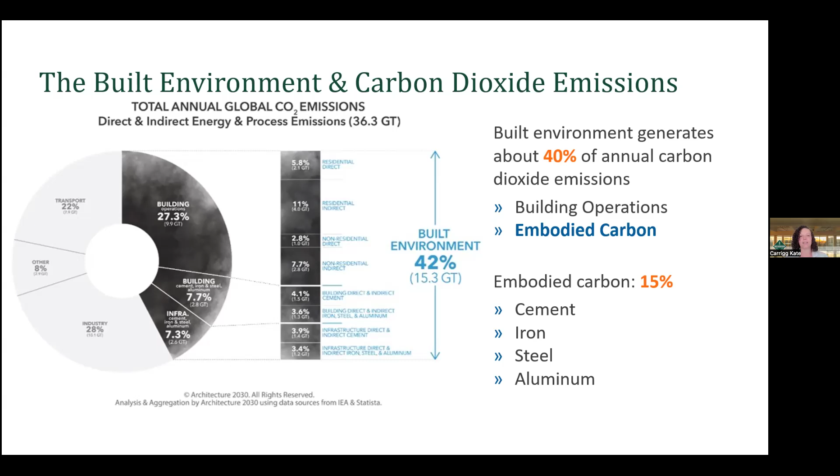And a smaller portion of that is the embodied carbon—that's the emissions associated with the extraction, processing, transportation, and construction with all of the materials we use. It may be smaller, but it's this large upfront cost that we pay every time we build a new building. It does represent a significant portion of overall global emissions, being 15% of all global emissions. So it's still something we need to be looking at, and it's something that's getting a lot more attention from our industry.

I mean, basically, we've decided that we need to build better. We need a better way to build, but I would argue that we already know how to build better. Our understanding of building science, our understanding of materials, basically everything we base our decisions on is above and beyond really what's required in our codes or what's required in our green building certification systems. It's above and beyond what most buildings are built to. Our understanding of how to build is above and beyond the way we build. And I think the question is, why is that, and how can we better address that?

Ultimately, the reason why it's hard for us to change as an industry is because there is so much diversity in our industry. Every building is built by a different developer or owner, and those owners range from single family homeowners to public entities, federal, state, and city governments. There are nonprofit organizations, tribal nations, and small minority women-owned emerging businesses that own buildings. There's so much diversity in all these buildings that are owned, and why they're owned, why they're built, and how they're used. So there are just so many layers in our built environment that we have to figure out how they all influence sustainability and address those layers to actually advance it.

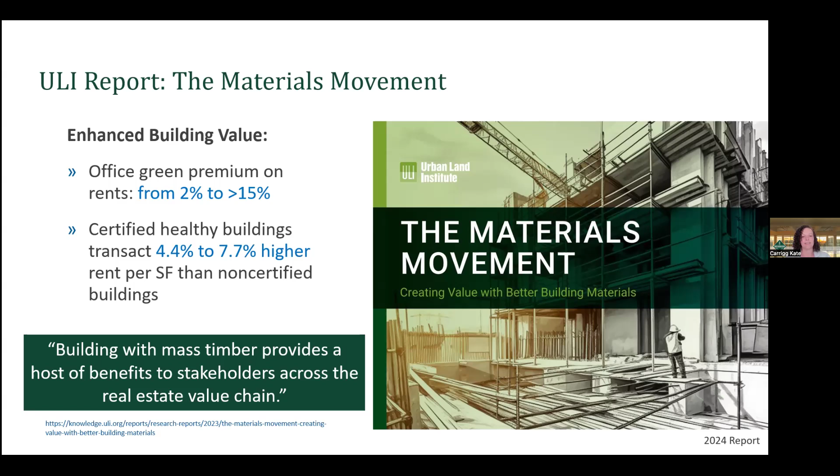That gives developers an economic means and an incentive to take more steps towards sustainability. But if you read that ULI report, they also mention a lot of other influences acting on decisions, and new policies, regulations, and incentives that are causing or urging developers to take more sustainable actions, even outside of those certification systems.

This includes some of the climate policies we're seeing - the buy clean and build clean policies - especially Cal Green, a very new policy adopted that actually requires construction projects of a certain size in California to demonstrate they are meeting certain embodied carbon goals.

There's also a lot of new incentive programs coming out, like the Inflation Reduction Act, which applies to all industries across the US, not just construction. We're seeing an emerging carbon credit market, again across industries. And just to add this in, it's not in the ULI paper, but the US Forest Service also gives out wood innovation grants. So there are a lot of opportunities to find ways to use more sustainable and renewable materials in buildings, beyond just the incentives from certifications alone. There's really a lot more movement towards doing whatever we can to influence change.

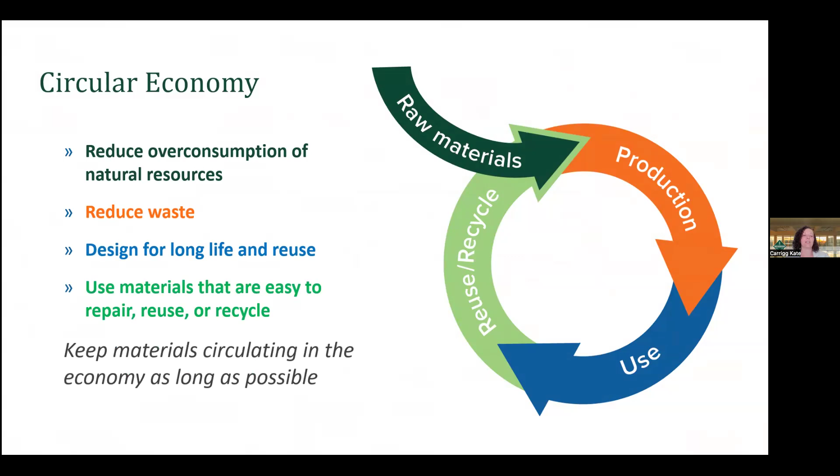The principles of a circular economy actually apply to all stages of the life cycle, not just the end use. These include the beginning, where we're trying to reduce overconsumption of our natural resources. In addition, we want to reduce waste. We want to design for long life and reuse. And we want to use materials that are easy to repair, reuse, or recycle, with the ultimate goal of keeping those materials circulating in the economy as long as possible.

So wood products and mass timber products are part of this large category of engineered wood and timber. This category of products is made from all different parts and pieces of the log, whether it's solid sawn lumber, veneers, sawdust, or wood chips, and it allows us to efficiently use our forests and our logs. It's not just about using smaller diameter logs that are faster to regrow, but also enabling us to use more of each log.

There's only so many rectangular pieces of lumber we can cut out of a log, or so much veneer we can peel off a small log. So by having these other products - our OSBs, our I-joists, our LSLs, and our particle boards - that enables us to take the remnants of what's left and also turn that into usable products.

So I was looking at a paper that Dovetail recently wrote. They're a consulting group that helps both landowners and end consumers make more sustainable decisions. And they reported that today's sawmills are capable of utilizing over 99% of each harvested log. 90% of that is directly used in wood products, and another 10% or so can be burned for energy recovery.

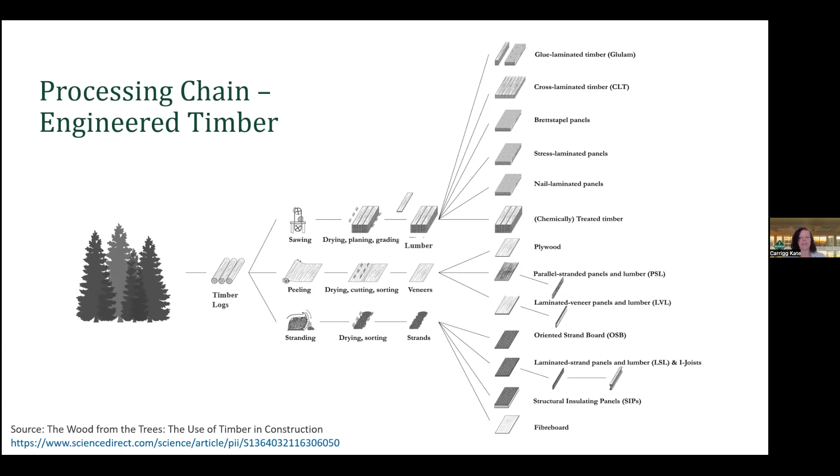The major difference between burning wood for energy and burning fossil fuels for energy is the fact that wood is part of its own natural carbon cycle. Trees are consuming carbon from the atmosphere as they grow, and then that carbon can be released at the end of the life cycle. That's going to keep occurring over and over. This is carbon that's cycling in and out of our atmosphere, regardless of how we interact with it.

So when we take wood and burn it for energy, what we're doing is working within that cycle, using the carbon that's re-entering the atmosphere, either route that it takes to produce energy as it leaves the forest.

That, compared to fossil fuels, is different because fossil fuels take millions and millions of years to store in the ground. Once we release them, which wouldn't have happened if we hadn't done that, they would take another millions of years to put back in the ground. So the more fossil fuels we release, the harder it will be to actually bring carbon levels back down, because those fossil fuels took millions of years to store in the first place.

So one major thing you're seeing across our energy industry is this goal of trying to figure out how to put that carbon somewhere. All that carbon we're releasing from burning fossil fuels can't just be put back into the ground. And that's where wood products also come into play.

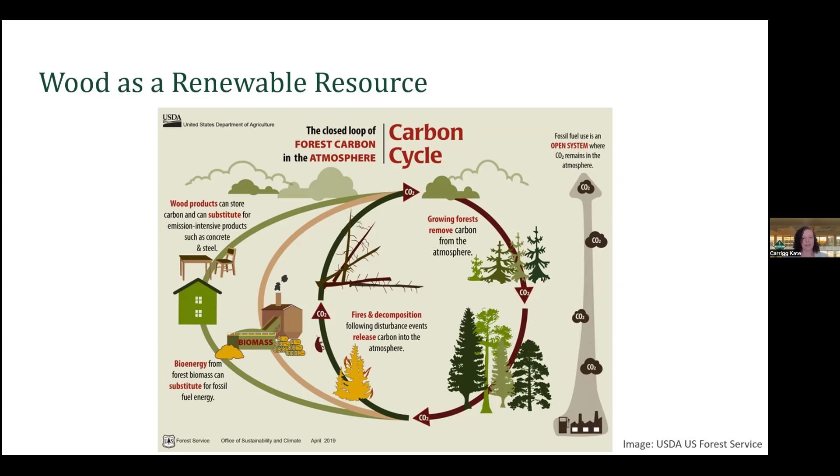And the ability to break down wood into smaller pieces and then put it back together into larger pieces of wood also enables more circularity within our wood industry. So in theory, we can keep that carbon circulating through our economy for a much greater period of time because we have such a large range of different wood products we can create with these smaller pieces of wood.

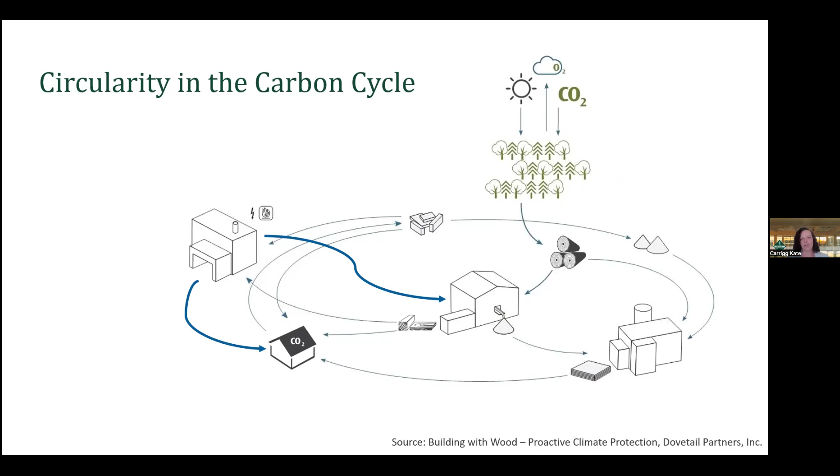And it's not just the carbon in our wood that's circular. The energy produced by burning wood, whatever is left after we get as many products out of the log as we can, can circulate back to our mills and give them the energy they need to process the next logs in the chain. Any leftover energy can also circulate back onto the grid and power homes or nearby buildings. So there's a ton of circularity just in the wood products industry because of the nature of wood and the fact that it's a renewable material.

But that all said, mass timber does have advantages. Mass timber is usually built with much more simple connections and no finishes, so it's easier to disassemble a mass timber building than it is a stick frame building. Mass timber is also a lot more valuable - it costs more than light frame studs because there's not a lot of material in a light frame stud. So all the work it takes to reclaim material has a better yield in a mass timber building than it would in a light frame building, and there's more economic incentive for someone to actually dismantle it.

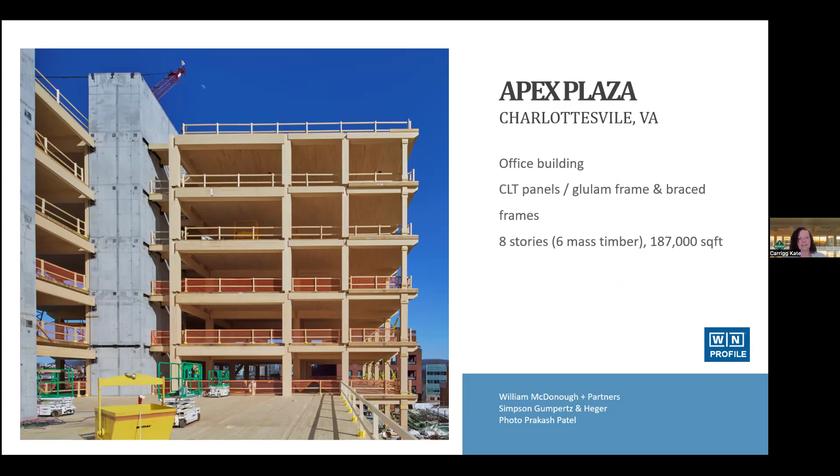One cool thing we're seeing more mass timber teams do, like the team that worked on Apex Plaza, is design their building and connections so that all of the connections are mechanically attached, and they design them to make them as easy as possible for disassembly.

One team actually reached out to me and asked what I would recommend as important considerations for designing for disassembly. Honestly, one I haven't heard talked about as much is communication. Because if I was an owner or contractor looking at a building and considering whether it's worth taking apart, I'd want to know what I'm getting out of it. If I had an inventory of every single timber member I could stand to recover, that would make that decision a lot easier. And if I had detailed information about every connection and how the team may have designed it for disassembly, that would make that decision even easier.

One cool thing about mass timber, especially prefabricated systems, is when we're working on those buildings we're creating digital twins. These digital twins are used in the computer-aided prefabrication process, so manufacturers need them to be able to CNC cut all of the members. But once we have this digital twin, it's really easy to make that inventory I just talked about, or documentation that can be used to communicate to future owners.

So, a lot of good reasons behind mass timber as well, but all of our wood products are important.

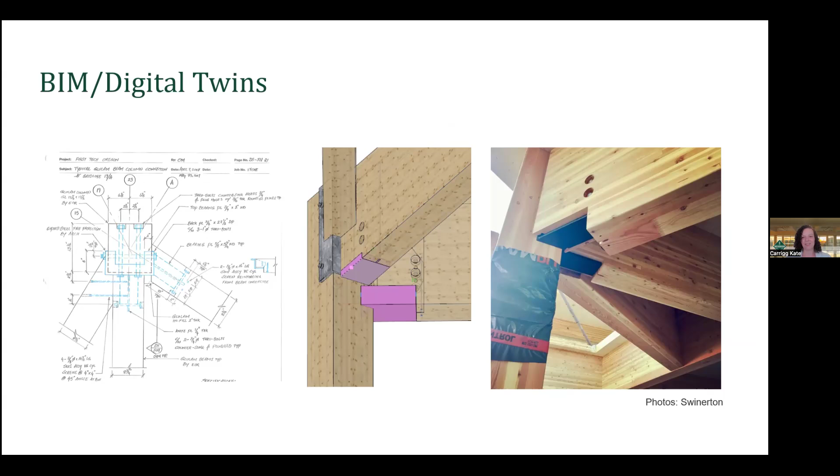The last concept of circularity we haven't addressed is designing for long life and durability. This is actually one of the biggest concerns I hear from developers deciding maybe not to use wood. So is that a reasonable concern? And should we be looking at durability?

So they were anywhere from less than 25 years old to over 100 years old at the time that they were demolished. In addition to looking at the age of the building, Forintek also looked at the materials used.

Forintek also surveyed the building owners to find out why they demolished the buildings, because that's important. If we find any sort of correlation, we need to know if there's also causation there, and that it's not just a correlation for some other reason.

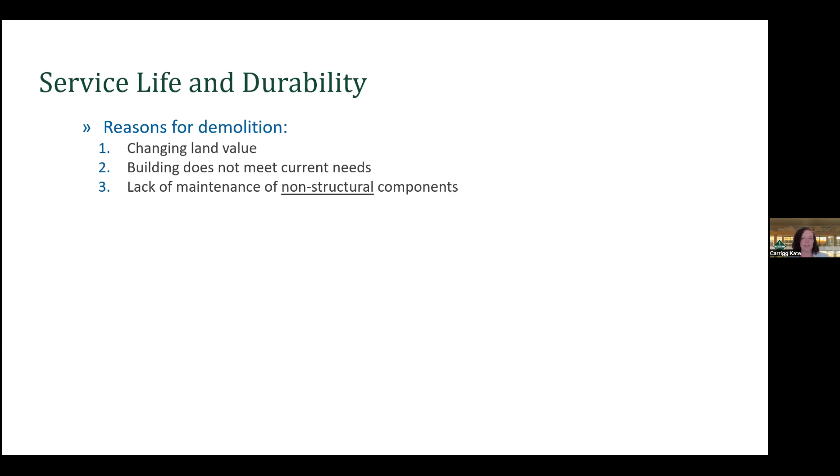So what we see here is that there's no significant relationship between the structural system and the useful life of the building. None of these reasons had anything to do with the structure or the material used in the structure.

And the ultimate conclusion of this study was that maybe we shouldn't be using a goal of long life and durability to select our materials, but rather we should be determining the realistic service life or useful life of our building, and then using that to make decisions based on the environmental impact of materials we're using.

In other words, maybe we shouldn't use high impact materials or non-renewable materials in buildings that we don't expect to be used for a long period of time. Because concentrating our efforts on reducing the impact of those shorter life buildings is ultimately going to have a greater benefit, because embodied carbon is an upfront cost.

And there actually are already standards that tell us how to do this. So these two standards here, the ISO standard and the CSA standard. CSA is the Canadian Standards Association. ISO is the International Standardization Organization, some combination of those words. But this is the US version pretty much, even though it says international.

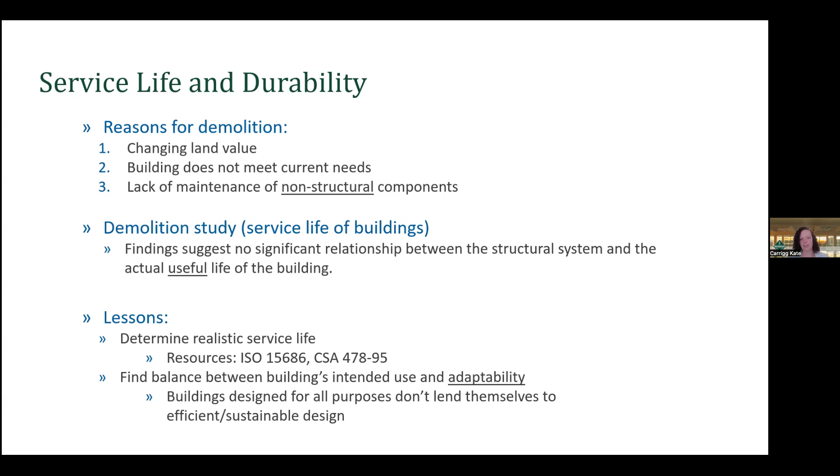Both of those standards are written to give a framework to designers to do what I just said, to establish the useful life of a building and then make decisions based on what that expected life is.

So one interesting correlation, remember correlation and causation are different, is that among the buildings, if you look at the age classes, the majority of buildings in the higher age classes were wood frame structures. We can't look at this and say that means wood is more durable than steel and concrete, because again, there was no connection between the structural material used and the reason for demolition.

But what we can conclude from this is that wood buildings are capable of lasting for over 100 years. They're capable of being durable. And also that in this area of Canada, which is very forested, Canada as a country is extremely forested, they probably started building with wood long before they started building with steel or concrete.

So if you think about Oregon, we are a very heavily forested state. Most of our cities were actually built around mills and around timber to begin with. And we also started building with wood long before we started building with other materials.

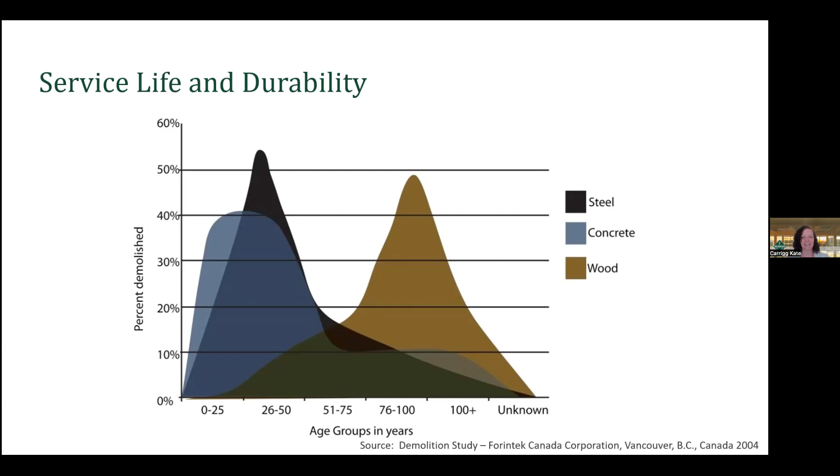So if your developers are ever asking this question, or if you are a developer and you want to see how a historic wood building has fared, you can go into any number of buildings across our state, and a lot of our historic buildings are timber framed buildings.

Now, a quick side note, because this wasn't supported in the investigation of that study, and it's just me speaking anecdotally from my own experience practicing as a structural engineer here in Oregon, where there are a lot of those old wood buildings. I've noticed through my career that there is a lot more drive among owners of these wood buildings to bend over backwards to retrofit them.

They were willing to put a lot of money into retrofitting the buildings. One building in particular I'll always remember was this old timber framed grain elevator in Carlton that was kind of cobbled together without any building permits by just rural farmers working in that area. The owner loved the building so much that I spent years redesigning retrofits for it.

They wanted to change how it was being used and actually open a winery or a wine tasting room, so they were really interested in finding a way to preserve the building.

I eventually moved on in my career because I wanted to go into construction, so I left engineering before that project ever moved forward. But I do know that they did eventually retrofit at least part of that grain elevator, and you can go do wine tastings there now. So if you're ever in Carlton, go stop by that grain elevator—I spent a lot of time crawling through it.

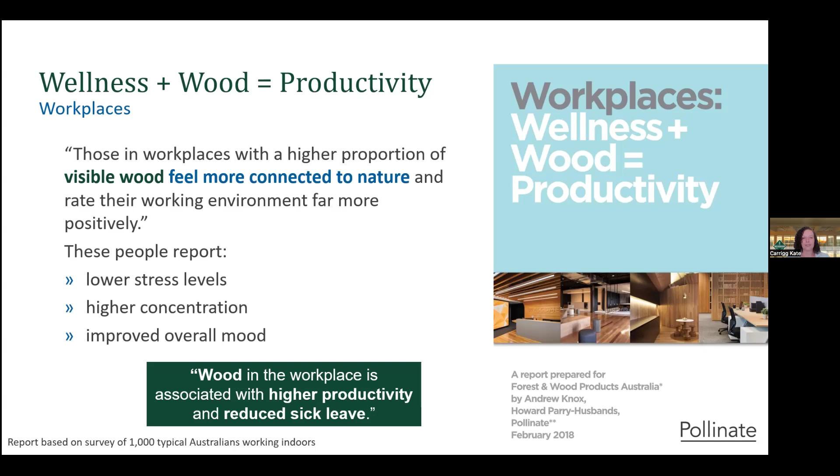Woodworks has also conducted our own study on the business case for biophilia and for mass timber in general. We looked at the cost of a range of buildings across multifamily and office buildings. I will say this was done kind of during COVID, so it's hard to separate cost data from these and separate out the impacts of COVID—it's kind of hard to use them for the cost side, and obviously office buildings aren't in as high demand after COVID as they used to be.

But there is still a lot of quantitative and qualitative information about the lease-up rates for these buildings. The qualitative information was really powerful in demonstrating, through storytelling, that owners were seeing higher quality tenants sign up for the buildings, that those tenants were signing up for longer term leases, and quantitatively, that those tenants were willing to pay higher rent premiums.

So there was a lot of evidence to show that mass timber could be used in combination with other strategies—it's not just the timber, it's the design of these buildings that really draws in more tenants and more interest, and creates a better business case for biophilia in general.

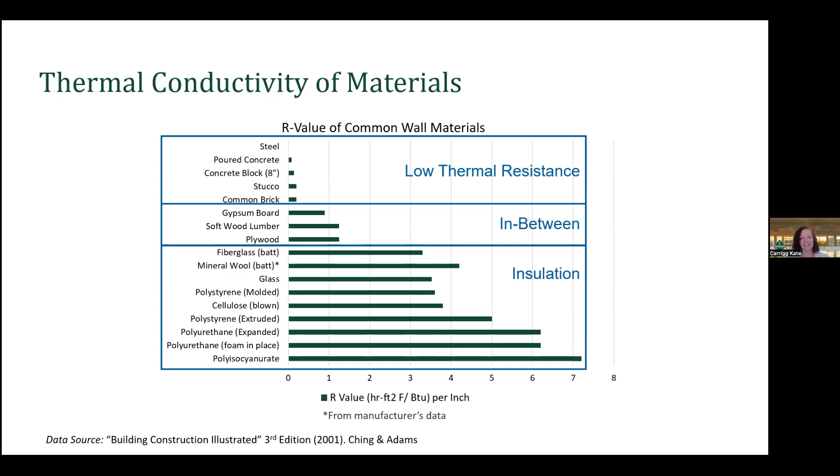But wood isn't as good at doing that as insulation, so again, that's why we shouldn't ignore our other wood products. Light frame construction is super economical, and simply substituting a wood stud into a steel stud wall without changing anything else can have a huge impact on the overall R value and thermal performance of that wall.

We've done all these measures and have a ton of information on how much you can improve that thermal performance just by that one simple switch. Light frame wood construction with wood studs is one of the most economical types of construction you can build, so this is a really good option for anyone.

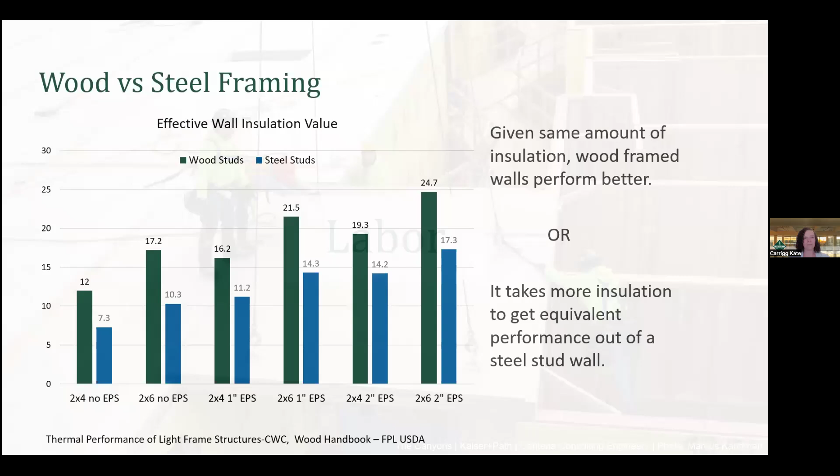All right, so let's talk about labor. We're moving backwards in our timeline again—now we're on the construction site. What are the health benefits? What are the social benefits on our construction site? For this, I think mass timber really has a lot to offer.

When we're looking at prefabricated systems—and mass timber isn't the only prefabricated wood product, there are other systems like modular wood buildings and panelized light frame buildings—when we look at these fabricated buildings, because that fabrication is done in the factory in a more controlled environment, there are a lot of labor benefits, both in the factory and on the site.

Factory workers benefit from that more controlled environment—there are fewer unknowns, fewer unfamiliar conditions that can cause safety problems. They also have the benefit of always working in the same location in terms of where they choose to live and their commute. They have more stability in their employment and their pay in general. So there's a lot of benefit to moving this labor off-site, from a harsher environment into a more controlled and conditioned one.

Now, on-site, mass timber—because that labor is moving into the factory—allows for smaller crews during timber installation. Instead of having this crazy ballet of different site workers all working around and above each other, possibly using equipment that could be dangerous to others, we have a much less congested site with just a handful of people who can all see and know what the other person is doing. And there really isn't a lot of equipment besides the crane, just the hoisting equipment.

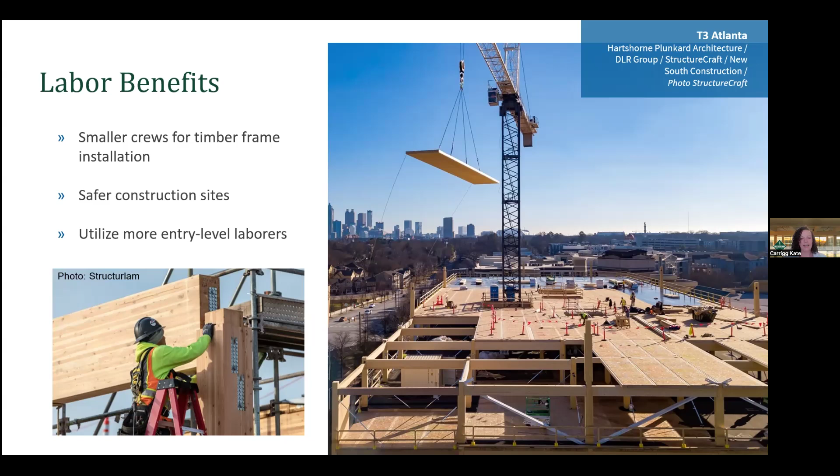We're seeing more and more mass timber buildings partnering with COBID partners, especially here in Oregon, so they can train smaller businesses that don't have as much access to work on these mass timber buildings and get hired. They can open the door for them, because it's not hard to install, and it's not that hard to design either. What's really hard is just finding out what it is, because it's such a new material.

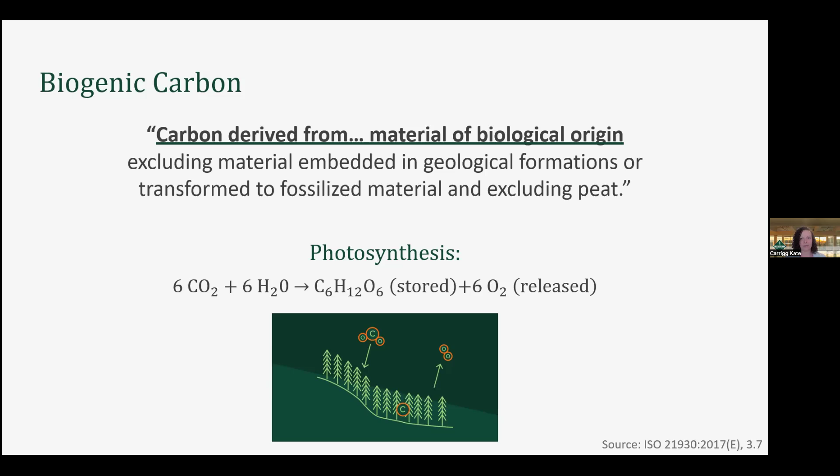Biogenic carbon in our buildings, in our life cycle assessments, is calculated based on that chemical equation - the amount of carbon actually in wood is based on the conversion of carbon dioxide into carbohydrates for use as a building block in wood. If we look at that equation, wood ends up being about 50% carbon by dry weight, and wood weighs about 30 pounds per cubic foot dry. So our buildings have about 15 pounds of carbon stored in them for every cubic foot of wood we use.

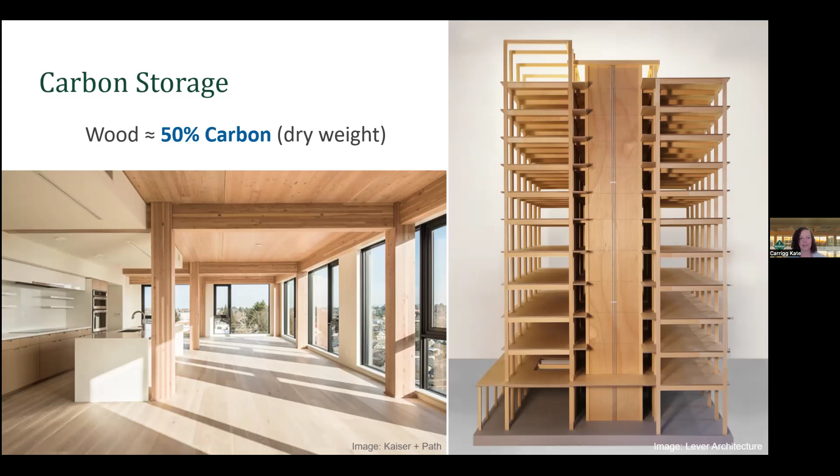It's actually pretty easy to calculate how much biogenic carbon is in our buildings. But there is one more step, because that carbon that I just calculated is solid carbon. And solid carbon has a different molecular weight than carbon dioxide.

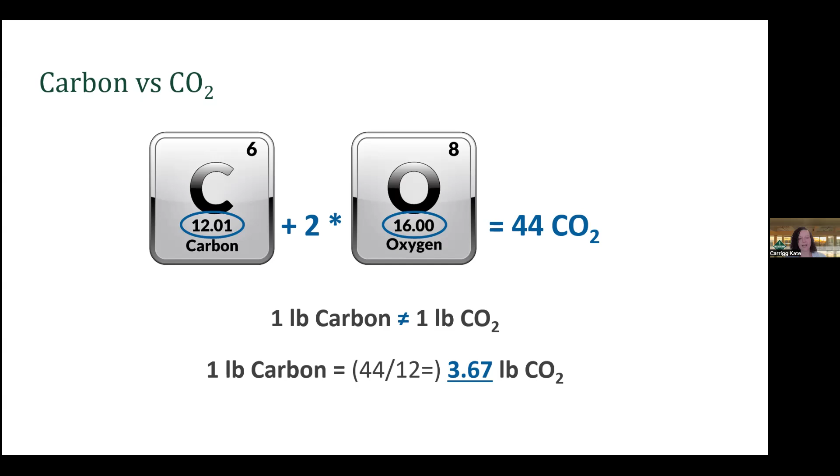So if we convert that solid carbon back into the amount of carbon dioxide that was sequestered to store that carbon, we get that every pound of carbon in our buildings represents 3.67 pounds of carbon dioxide that was removed from the atmosphere. So that's the full calculation for figuring out how much embodied or biogenic carbon is actually in our buildings. And then we track that separately from embodied carbon.

So when you're looking at a wood building versus a non-wood building in a life cycle assessment, in the wood building, what you're seeing is the embodied carbon emissions in this red arrow.

And that includes all of the emissions from going into the forest, removing the logs, building those roads, transporting the logs. It also includes all of the manufacturing, drying the wood, any additional transportation, any power used throughout those stages that didn't come from burning wood, since that is a neutral emission.

It also includes power used to create or grow seedlings, and power used to take those seedlings out into the forest and replant the forest. So that's all included in embodied carbon in the red arrow.

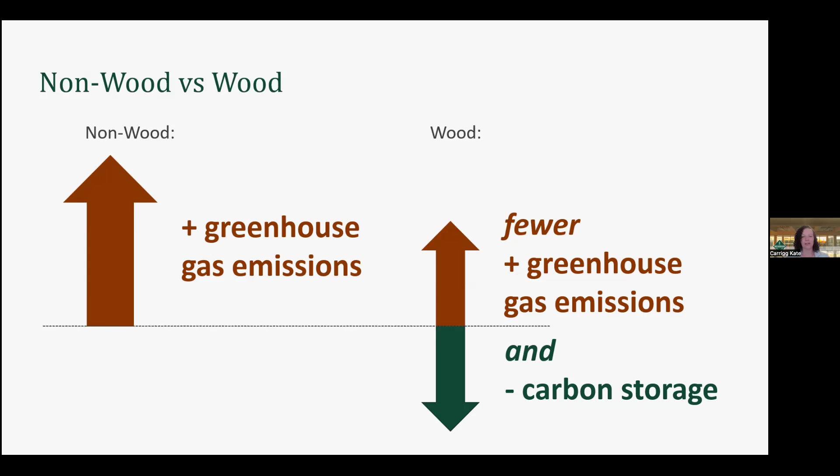And then our biogenic carbon is the green arrow, and that's included as a negative. So it's a negative emission or a storage, and it helps to offset the embodied carbon emissions on the top side, that red arrow. So again, wood has a lot of advantages in life cycle assessments, and it just comes down to the science behind wood, and just the fact that wood is a renewable material and part of its own carbon life cycle.

And I'm going to talk through that pretty quickly because we're pushing to the end of our time, but I had to hide a lot of slides to dial this presentation down. So please ask questions, and I do have more slides to talk about if they come up in questions.

So for this, I want to take a step back and really draw a parallel between the construction industry, the built environment, and the forest. Because I think we understand the built environment a lot better than we understand the forest, and so it's easier for us to just understand all the influences in our own industry.

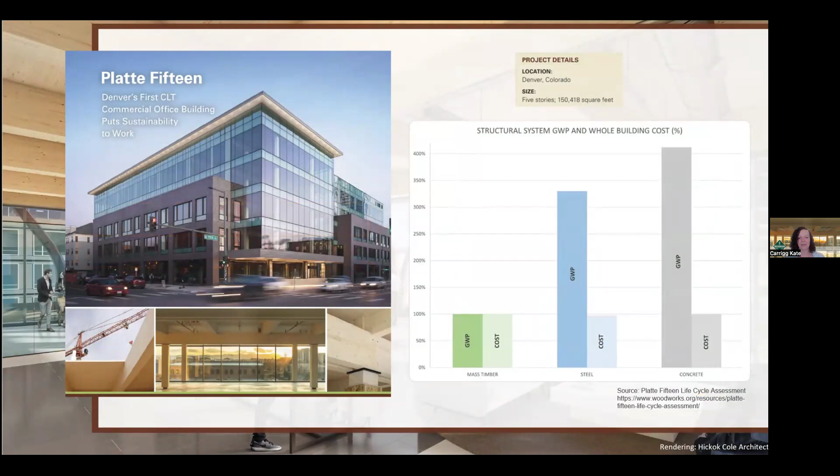I would add, since there aren't any questions, that there are a lot of resources and folks can also reach out to me as well. We have a ton of resources on life cycle assessment and how the standards require you to handle biogenic carbon, as well as information about how each individual life cycle assessment tool accounts for biogenic carbon. We also have a new series of comparative life cycle assessments becoming available. The first building has already been assessed - it's a building in Denver, Colorado called Return to Form. The team designed that building, a 4B multifamily mass timber structure, three different times: one with light frame construction, one with mass timber, and one with concrete. Then they did full life cycle assessments and full cost assessments. That's in this series, and there are three more buildings in the works as well, different sizes and types. We also already had an existing study like that for an office building in Denver. So more information on full life cycle assessments is becoming available, because these are a heavy lift for designers to do, and we recognize that. There's also a lot of information available for designing with mass timber efficiently and designing with wood efficiently, because even though it's a low impact material that can store carbon, we still want to use materials efficiently. A big step we can all take as designers is to just use materials in our buildings more efficiently, and that will go a long way as well.

That's a great point. Thank you - it sounds like Woodworks has an amazing library of resources. That's really great to know and understand, so thank you so much for sharing that.